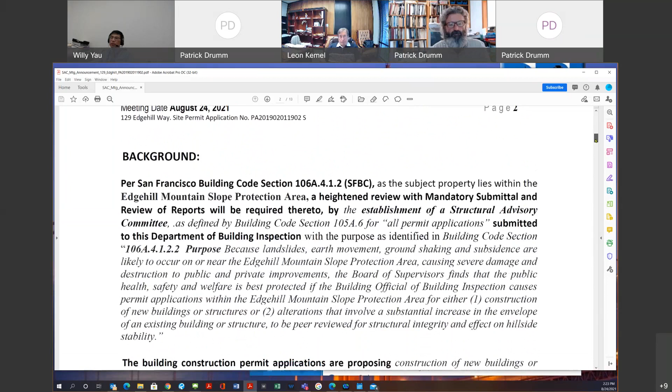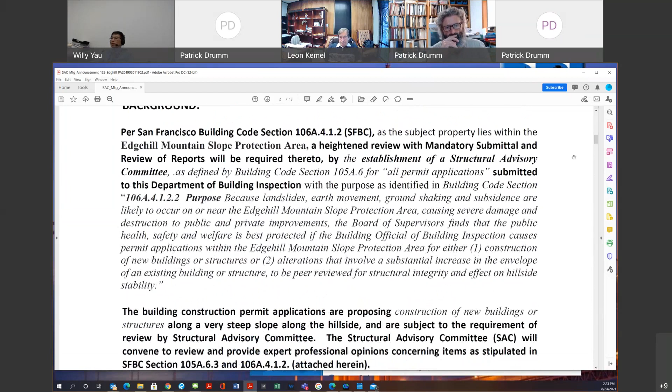Per San Francisco Building Code Section 106A.4.1.2, as the site lies within the Edgehill Mountain Slope Protection Area, heightened design review, with mandatory submittal and review of reports, will be required by the establishment of the Structural Advisory Committee as defined by Building Code Section 105A.6 for all permit applications submitted to the Department of Building Inspection, with the purpose as identified in Building Code Section 106A.4.1.2.2. Because landslide, earth movement, ground shaking, and subsidence are likely to occur on or near the Edgehill Mountain Slope Protection Area, causing severe damage and destruction of public and private improvements.

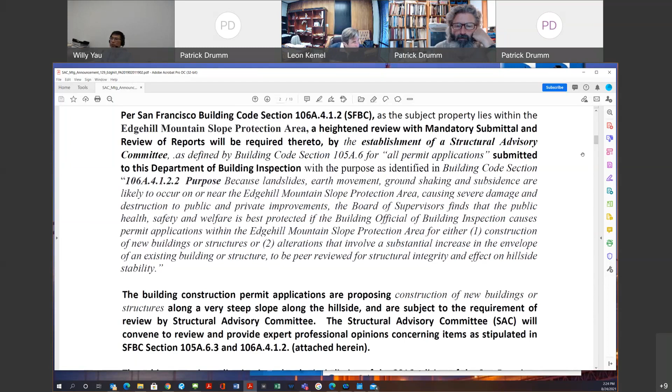The Board of Supervisors finds that the public health, safety, and welfare is best protected if the building official causes permit applications within the Edgehill Mountain Protection Area for either one, construction of a new building or structure, or two, alterations that involve substantial increase in the envelope of an existing building or structure, to be peer reviewed for structural integrity and effect on hillside stability. The building construction permit applications proposing construction of new buildings or structures along a very steep slope along the hillside are subject to requirements of review by the Structural Advisory Committee.

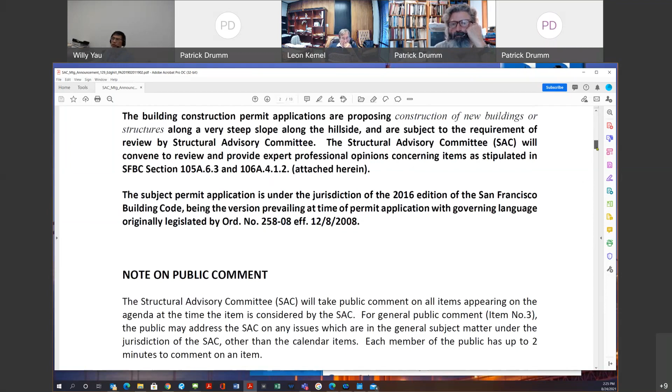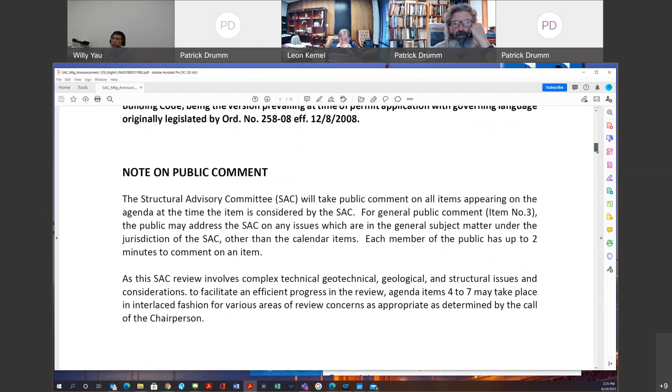The Structural Advisory Committee is convening to review and provide expert professional opinions concerning items as stipulated in Section 105A.6.3 and 106A.4.1.2, attached in the announcement. So the subject permit application is under the jurisdiction of the 2016 edition of the San Francisco Building Code, being the version prevailing at the time of permit application, with governing language originally legislated by Ordinance 258-08, effective December 8, 2008.

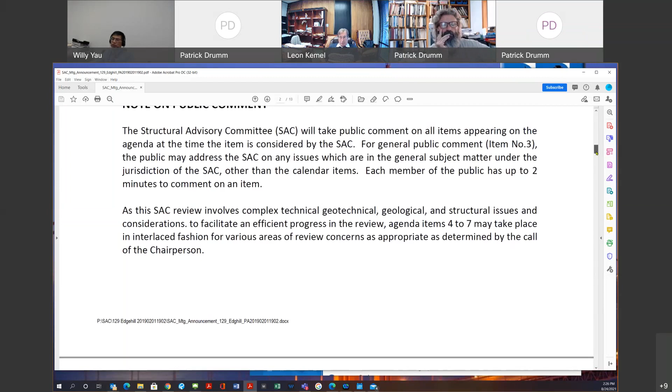Okay, the Structural Advisory Committee will take public comments on all items appearing on the agenda at the time the item is considered by the SAC. For general public comments, agenda item number 3, the public may address the SAC on any issues which are general subject matters under jurisdiction of the SAC other than the calendared item. Each member of the public has up to 2 minutes to comment on an item. As these SAC reviews involve complex technical, geotechnical, geological, and structural issues, to facilitate efficient progress in the review, agenda items 4 to 7 may take place in interlaced fashion for various areas of review concerns as determined by the call of the chairperson.

So let's move on with the agenda. We've got to do the roll call. Frank L. Rollo, Geotechnical Engineer. John Wallace, Certified Engineering Geologist. I'm here. Okay. John Hom, Structural Engineer. John? Can you hear me? Yes, you're here, right? Yeah, I'm here. Okay. Harvey Hacker, Architect.

Here. Okay, so the next item is the SAC to select a chairperson to conduct this SAC review meeting. Any motion? I nominate Frank Rollo. Okay, any second? I'll second. Okay, and let's take a vote. John? Yeah. John Wallace? Yes. And Harvey? Yes. You have the motion.

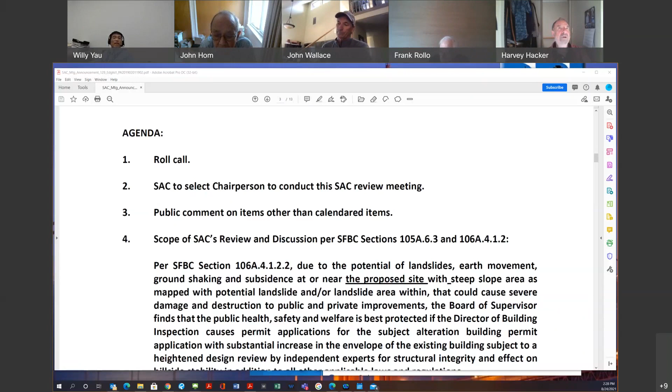So Frank, you are selected as the chairperson to conduct this meeting. So I'm passing this meeting to you. Okay. All right, thank you very much, Willy. So let's start by Troy or Leon, whoever, one of you introduce your team and their role.

Okay. So I'm Troy Kashanipur. I'm the architect for the project. We have with us today Leon Kemel, who represents the owner, JUB Investments. We have Alex Voldarsky, did I say that right, Alex? I hope I got the last name right. So Alex is kind of a project manager and coordinator for the engineering side of this, which includes, we've got Gary Kleiner.

Did I say that right, Gary, your last name? And Gary is on the shoring engineer portion. We have on the call, we have Tony Samra. Yeah, Tony, I'm sorry. Yeah, I'm looking for this name listing. It's not showing up here. So we have Tony also on this. It's shown at the end. What's the last name, please? Samra, S-A-M-R-A. Thank you. And then we have Patrick Drumm as the geologist.

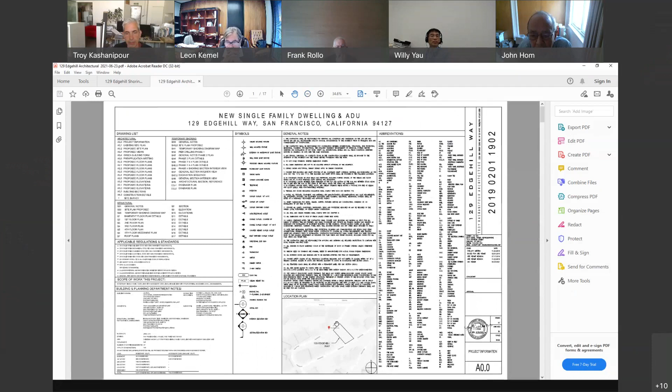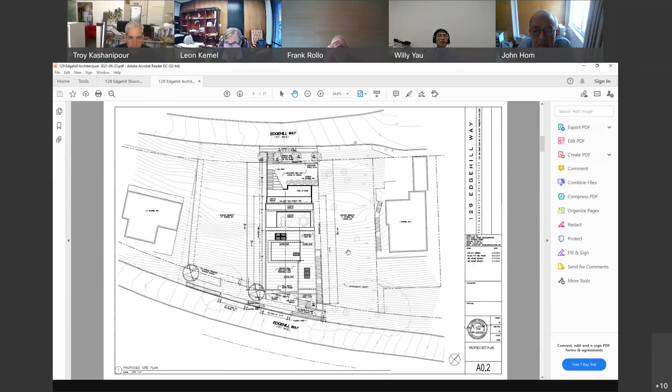So the basic site map: Edgehill is a curvilinear street with the lower portion of Edgehill being towards the north and the higher portion towards the south. This property at 129 was previously 3 vacant lots. There has been a home built at 127 Edgehill. There is another proposed home at 131 Edgehill being coordinated by a different architect. So let me go to a basic 3D view. As you can see in the upper left photo, the entry is at the top portion of the hill with the 2-car garage and living space behind the garage. And then the building steps down roughly following the slope of the hillside with the idea of minimizing the amount of excavation.

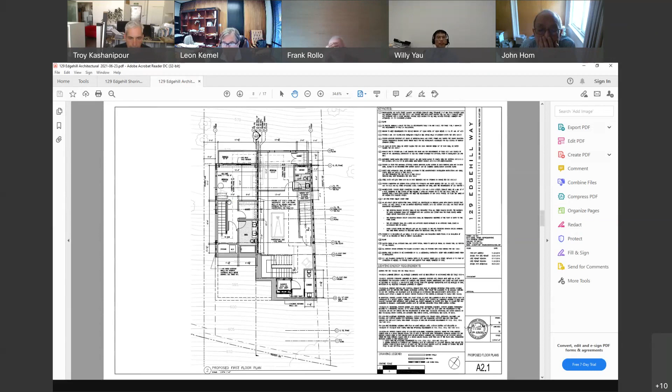I'm sorry, can you go back to that? I assume we're looking at the middle building, right? Correct. Yes. So this is the proposed dwelling at 129. The white building to the right here is at 127, and that is already constructed. And you may remember that project going through SAC review maybe 3 or 4 years ago. Very well. The building at 131 is here to the left as currently proposed. So if you just look at this rear view, let me see if I can zoom in a little bit.

This upper level here is the main living level, and then this area under the slanted roof is the mezzanine itself. And so we have 1, 2, 3 levels below the main living level, and then a basement level, as this below grade level qualifies for the definition of a basement. And this is as seen from the lower level of Edgehill Way.

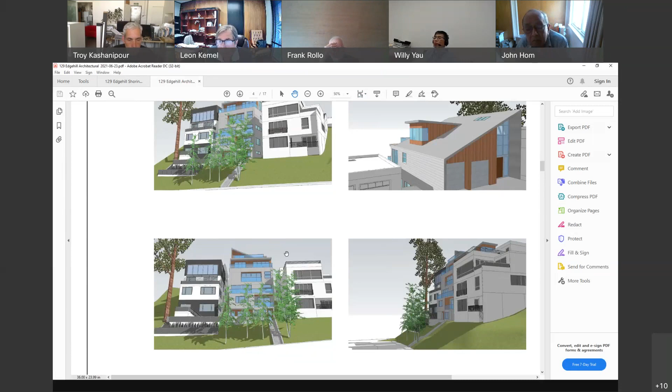On the side view, again, you get a little more perspective on the stepping of the volumes going back from the lower portion of Edgehill, terminating at this mezzanine level underneath the slanted roof. Let me just skip over to the... Troy, quick question, if you can go back to that previous drawing.

Sure. Okay, I just want to point out that the area below all the buildings is actually improved, not like a grass lawn as we see now. It has retaining walls, it has steps, it has all sorts of things. So there's an approximately 5 to 7 foot retaining wall at the property line, and the grade is not as substantial as shown here.

On building 127 itself, you mean? Yeah, correct. The model does not reflect the work that was done at the rear of 127, the existing building. Right. I just want to point out that that is the case. Okay. Oh, thank you. That's a good comment.

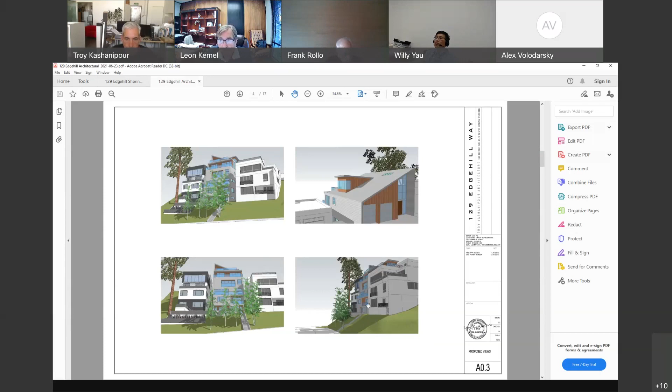You have a picture, Troy. What's that? Well, you have a picture. Let's focus on the architect making the presentation. The questions will come from the SAC. And then if the other members of the team wish to make comments, they can. But this right now is the architect's presentation, followed by Harvey and then the rest of the SAC. So let's focus. Go ahead, Troy.

Thank you, Frank. So I'm just moving over to the floor plans. This level that is on the screen now represents the basement. I have tried to coordinate the grid lines moving up through the set between the architectural and the structural drawings. And so this is the lowermost level considered a basement.

And then stepping up to the first floor, we have a small terrace, and then there is an accessory dwelling unit associated with the property. So this leftmost portion is part of the ADU, and the rightmost portion is part of the main home. So first floor plan, stairway coming up, and then the main stairway, an elevator shaft that integrates the entire building.

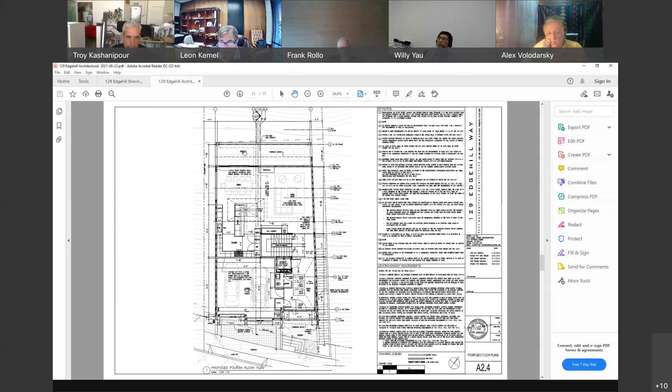And then one level above grade, we have our mezzanine space, meeting the definitions of a mezzanine, and then another terrace level above the floor below. And that's the fourth floor mezzanine.

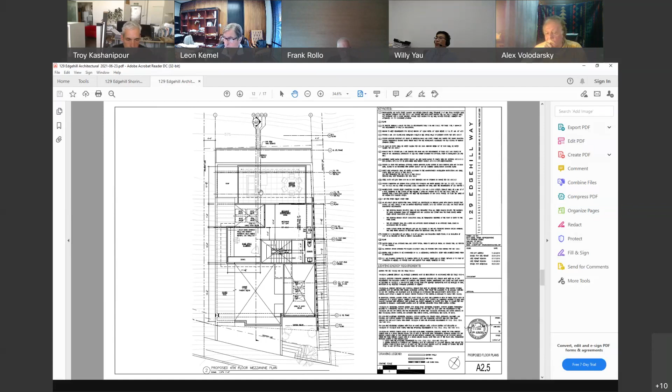Looking at the rear and front elevations, I've dashed in the street elevation at face of curb, and then the grade at the face of the building on this proposed south elevation. And then the rear elevation, of course, you can see all of the levels of the building, including the mezzanine and the basement level. The basement level at the rear has a full exposure, I would add. So it's not what you would think of as a below grade basement.

The side elevation, this is west, showing the existing contour at that west face of the building. And then the same exercise on the east side, showing the existing contour line at that east face. And then the building itself, showing the cross section at the middle of the lot, so you can kind of see the approximate level of cut, and in some cases where there is no cut relative to the existing grade. And then the rest are just architectural details as needed for permit in this set.

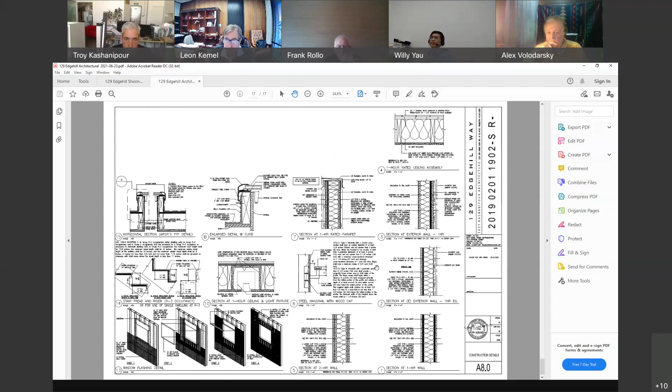Can you go back to that drawing? Was it A3.3? 3.3, this cross section? Yeah, there you go. So that line represents the ground surface today? That represents the existing ground surface at the center line of the lot, right, the center line of the building. Okay.

So what is the maximum cut? Unsupported. I think the maximum cut is approximately, it's a little small on my screen. So it's about 15 feet, I would say, at this location. Where's that? That's grid line C0. Okay, the one I'm looking at shows that the cut is about 10'6", but it's more than that then. Yeah, I measured 17 feet, Frank, is the max that I saw from the base of the slab to the top.

And I guess we'll see that on the structural. Okay, well, thank you, Troy. Are there any additional questions from me? Well, yeah, Harvey, it's all yours. Can you hear me okay? Yes. I understand the plans and the sections. I have no questions.

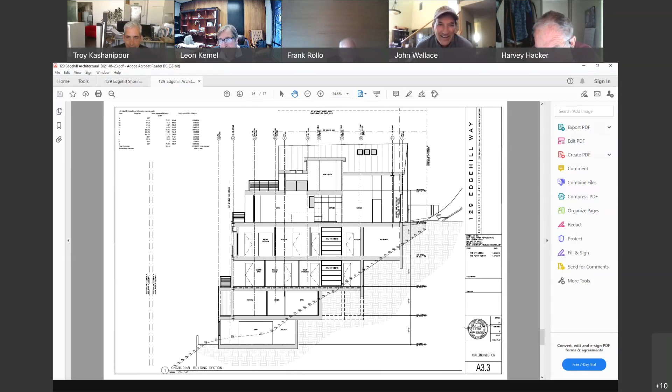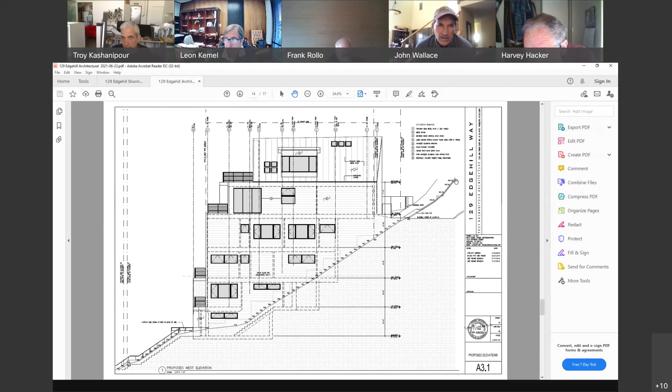I think the best drawing to look at is A3.1. Look at A3.1. You'll see the road. And then he's showing a projection of the road going uphill as well as the slope at the back of the road. He's showing two things on that. See where it says sidewalk entry? And you see it says new curb? Yeah, that's actually the street going up. And then if you go to the right of that, he shows the street with another slope.

So what he's showing is the street going to 131 Edgehill. It's not necessary to show it. It's confusing. It's really confusing. Yeah. And if you look at that same drawing, you'll see that the maximum cut on that one, if you add the two, you get 11'6" and 10'6". You approximately have 21.5 to 22 feet of cut. Just for making, so, okay. John, do you have any more questions of the architect on this? No, that was it. Okay.

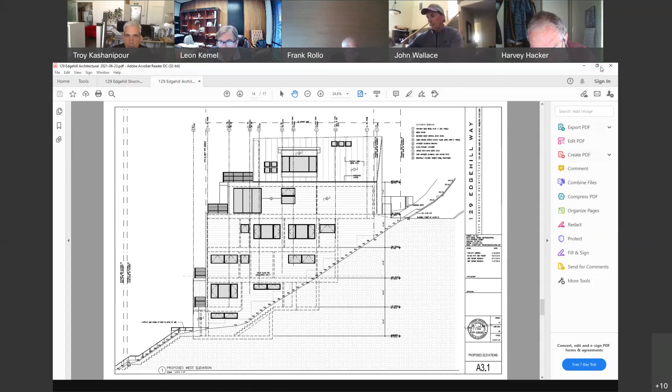I will have more questions later on, Troy, when it comes to drainage, subsurface drainage, but I'll reserve that till later. I think we should go on to now what is perhaps the most important part of this discussion, and that will be the geology. So Patrick, perhaps between you and John, you have put on many years walking these hills. Perhaps you can walk us through the history of the site as well as your...

Chairman, yes, sorry to interrupt. Do you entertain staff questions regarding architecture? Sure, absolutely. Okay, I have a comment on this thing here. Looks like more than 4 stories of construction are being proposed in this Type 5 building. So I was just wondering if you anticipate having Type 1 construction with the Type 5 on top?

No, if I can refer you to the pre-application meeting from Irene, it is Type 5A construction. We did the grade plane calculation to document the lower level as a basement, and then the top level being 1/3 the area of the upper floor, which would qualify as a mezzanine. So that's the approach that we've taken with it. Okay. Now, be aware that you cannot have more than 4 levels of combustible construction in this Type 5 here, right? There's no more than 4 stories. Not 4 stories, but 4 levels of combustible construction.

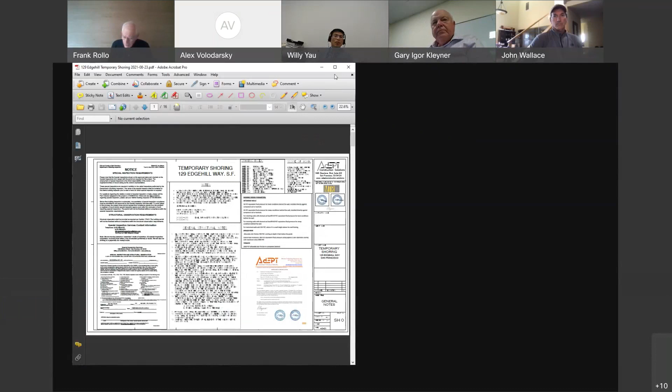But you're going to have to show your calculations. I'm not here to check your calcs. I'm just checking the design parameters. DBI will do a thorough job of that. I would like to walk through your drawings. So, Troy, if you would put the shoring drawings up, and we'll start with SH0. Okay, can you see that?

Yeah, the letter that I have is dated April 28th, 2021. Do you have a different letter? Yes, it's August 10th, 2021, in the current set that came a couple days ago, and I added it to the folder. Frank, it was too late to get you the printed copy, but it is in the shared drive folder.

Okay, Chairman Rollo. This is Willy. I have to discount everything they put in without noticing us and without noticing the public. Those items should not, and I've mentioned it before, be included in the common file because that is for all the public to review. So procedure-wise, those documents should not have been there.

If there is anything after the initial announcement that is going to be updated, it has to be presented during this meeting rather than being in the common files that we are announcing the SAC review meetings on. And this is a serious problem that you start changing stuff in that Dropbox, and it is prohibited to do that. Right, I'm with you, Willy.

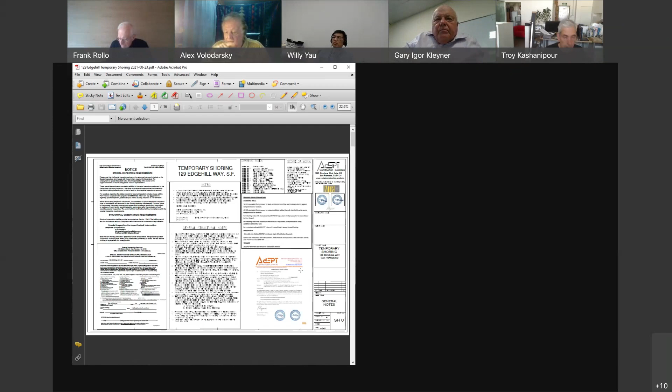Somewhere on these drawings, there has to be a testing procedure for the tiebacks. Do you load them in 10% increments, 20% increments? Are they proof tested? Are they performance tested? What's the lock off? What's the allowable deflection that will be allowed? There has to be a procedure for tieback testing, and it's not present. Okay, we'll add that.

SH1. This drawing shows on the shoring diagram 2, SH1, a gravel backfill behind line D. You've just created, for the driveway upper portion, a bathtub. Yeah. That's a big drain filled with gravel, and it's acting as a bathtub.

Now, unless you've designed a pipe outlet that can handle the water that would come from that bathtub, I strongly encourage you to reconsider a gravel backfill and go to a sub drain behind the wall and then a compacted fill behind that. Well, there is a sub drain, and as well as below the surface drainage, there is a number of pipes in that area. Yeah, but they don't show up anywhere. So we'll get to that.

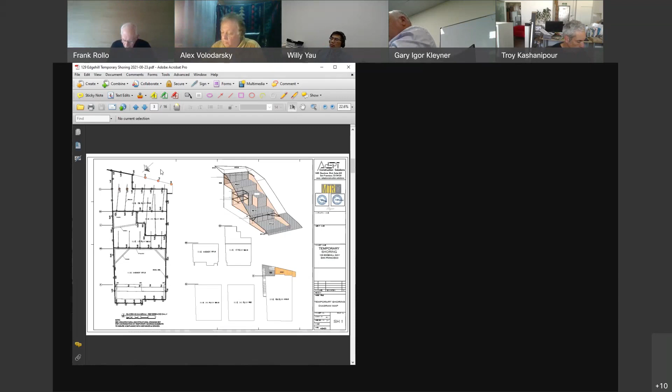You're gonna use a drain board receptor to drain the backfill. And it's what, 6 feet deep? No, it's not 6 feet. It's approximately 3 feet deep. Well, if you can demonstrate that you can handle any drainage coming off of that, I'm happy with it. But check that, please. Would you go to SH2?

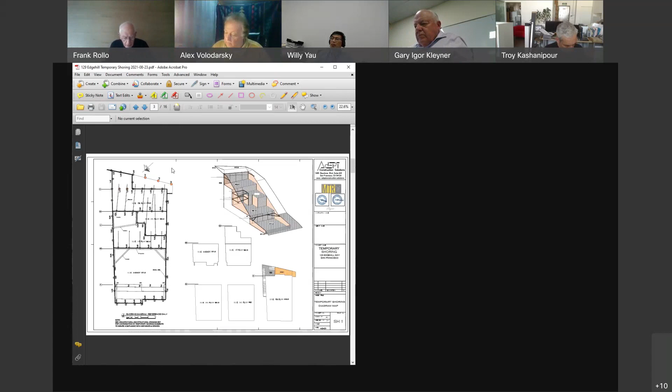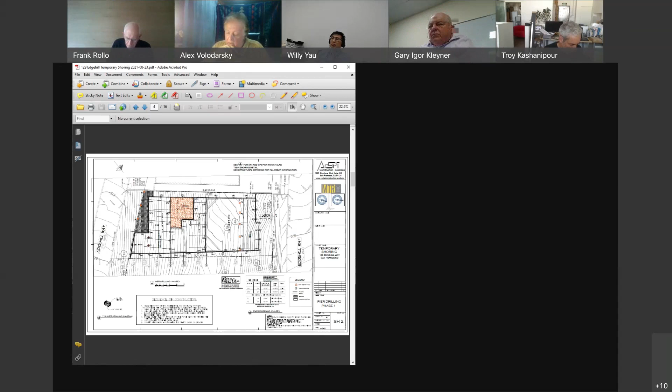SH2, John has indicated, we'd like to see the soldier piles numbered and the tiebacks numbered. And if you go over to the pile schedule, it says that SP1s and SP2s are 24 inches diameter and that the drill depth is 10 feet. How can that be? Well, we're taking the depth from the base of excavation at any given soldier pile. I appreciate that, but that's not what it says. This is depth below excavation, so please say that.

I already have it in my change plans. I know, but it's already done. Okay, thank you. Well, those change plans don't exist right now. I know. Okay.

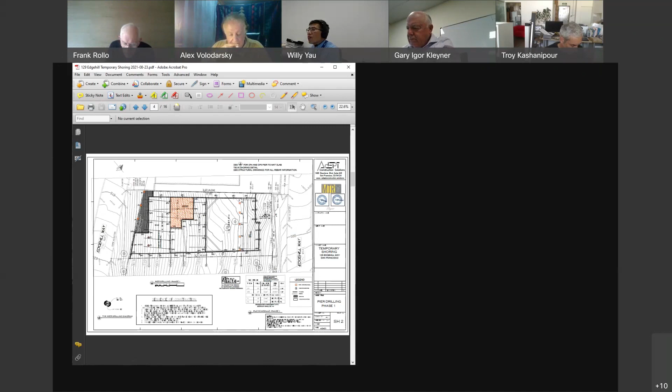It'll show all that. Okay, under the sequence of construction, it says install soldier pile, leave 5 foot extended as shown. Where does it show that? Well, on the soldier piles in detail 1. I got it. Where's the extended? Oh, I see. Got it. Thank you. All right.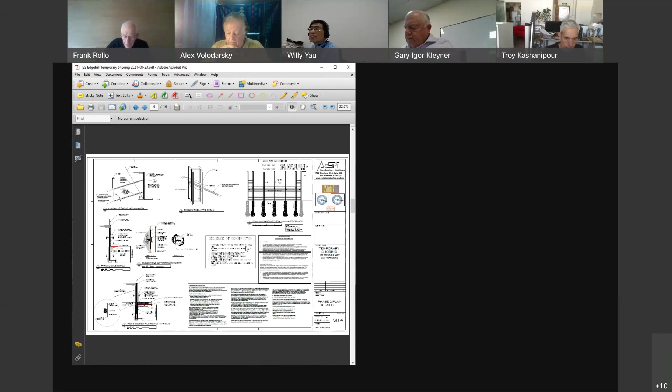SH5 is a braced wall. Hold on, let me turn the page. Okay, SH5, it's a braced wall. So that wall is designed for 30 PCF. It seems to me that you've got two conditions. You've got 9 feet of soil. How are you considering it? I assume the soil is higher.

Well, there are two different conditions here. There's 2 lines. There's expected bedrock and there is substantial soil. The upper 3 feet or 4 feet are what is considered a loose soil. Below that, we have a very hard clay. And below that, we have a very hard bedrock.

Okay, I'm sorry, but you must be looking at a different geotechnical report. I'm looking at the only tests that were done, for SPT, I'm sorry, dynamic cone. And if I look at the dynamic cone, you classify it as a medium sand. And then I don't see any clay.

And it goes on, and then on boring 2, it's sandy soil, poorly graded with bedrock debris. On boring 3, it's a sandy soil with bedrock debris. There's no distinction between whether it's slope debris or fill. So you do not, based on the boring data, have any hard clay.

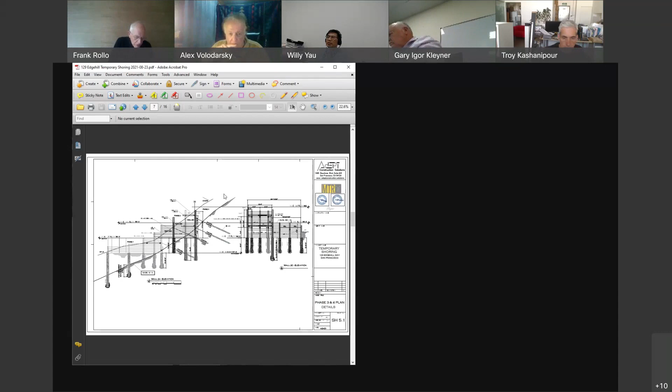And then on SH 5.1, you show that gravel again, and you believe that that's shallow. And then on SH6, you're calling out the ground surface. It would be helpful if on that diagram you plot, based on your borings, the 5 to 9 feet of soil, so you can see what I'm talking about as far as whether the soldier pile lagging and the tieback should be designed for soil condition. I'd like to see a profile on SH6.

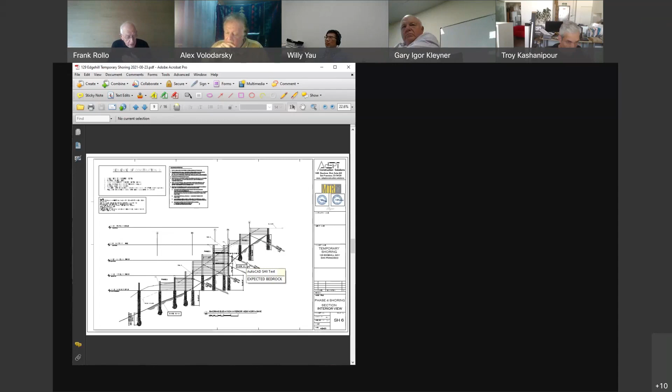Right. I've drawn it for myself on SH7, so that we are on the same page. If you go to SH7, that gravel is 8 feet thick. Yep. Not 4 feet thick. On the top or on the bottom? At the bottom. I love it. On the bottom, I have bedrock at about 13 feet deep.

All I'm asking is just please look at it. If you plot the ground surface at 606, the rock at that location is about 7 from that, 599. That entire gravel backfill is sitting in soil. None of it is sitting in rock. That soil is going to get saturated. That soil creates a problem for you if you don't have adequate drainage. Right, I agree. That's why on that sheet I show benching.

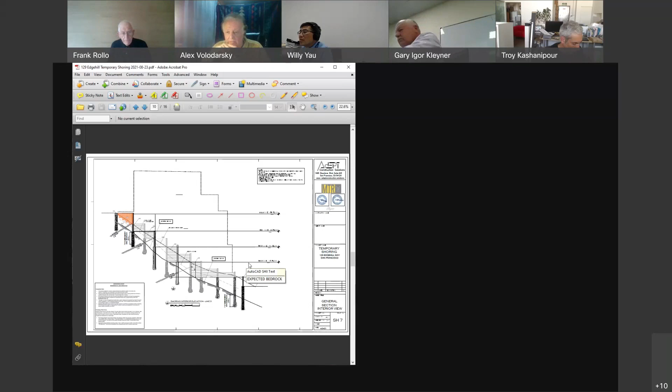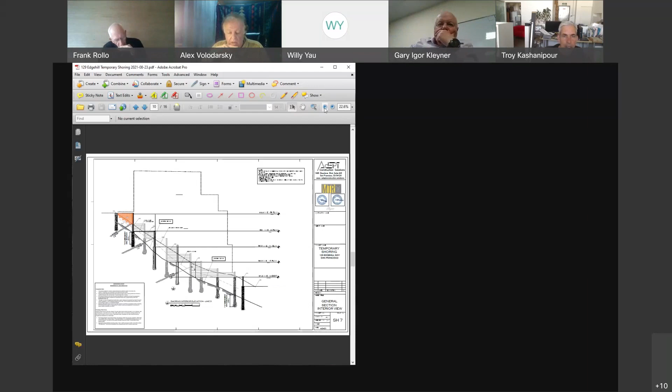Hey, sorry to interrupt. Troy, can you maximize the screen, please? Maximize the window, the PDF, yes. Let me see if I can do that. Sorry, wrong way.

See, the front part, the upper part, the benching is actually not the existing grade. The benching adds the height of that gravel, approximately 2 feet.

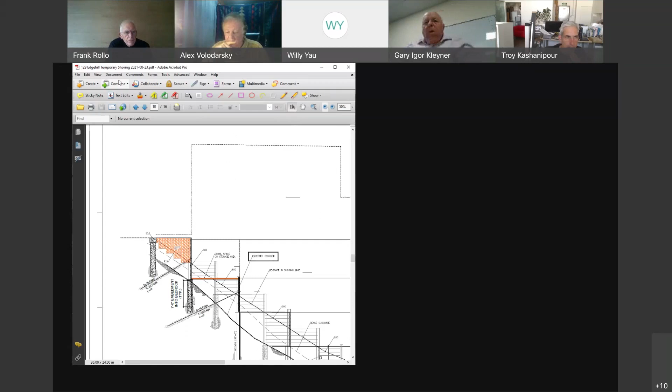Yes. Could you click the square next to the X, please? Square next to what? Top right of the window, of the PDF window. Just maximize it. Have I not? Give me 1 second to figure out how to do that. Gentlemen, I'll be right back. Needs a bathroom break real quick, sorry.

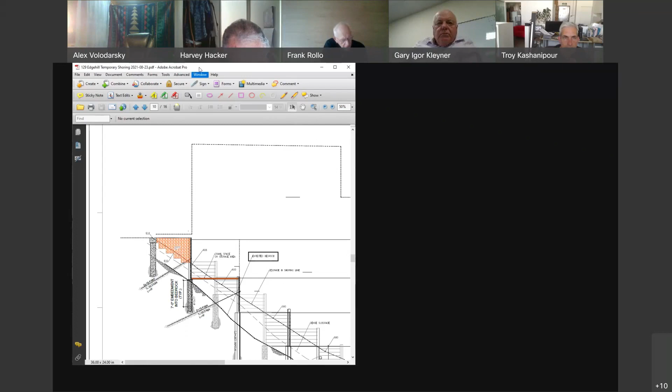Sure, but my point on that is you keyed the fill into loose backfill. That fill should be keyed into rock. That fill, in my opinion, should not be gravel, which is acting as basically a seepage. You're going to allow that area to act as a bathtub and fill with water.

And actually, Frank, this is John, that's not even native soil up there. That's road fill that was cast over, and it's even looser and in worse shape than the actual in-place soil. Thank you. You strengthened my argument. You got to key that into rock, yeah. Put it in as a compacted fill. So the main point here is that either the gravel backfill needs to be reevaluated, or the drainage system needs to be able to handle that volume of water.

Is that? No, I'm suggesting the gravel acts as a bathtub, and you're not going to be able to show me a calculation that shows it draining quick enough, especially when you're using a drainage panel. Second, you've got the gravel blanket keyed into loose to medium dense material that hasn't been distinguished between fill or slope wash. But as John pointed out, when they did a cut to fill for the road, that's all dumped fill. That should be keyed.

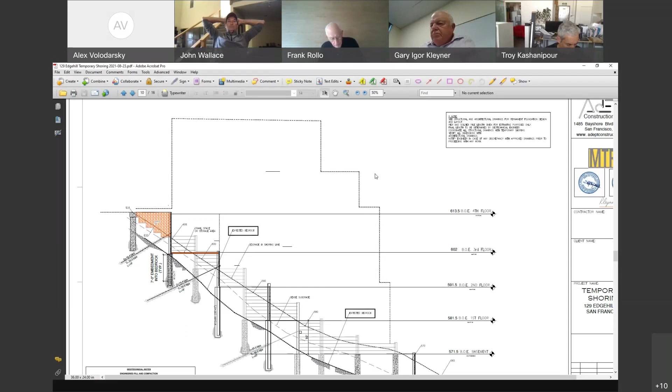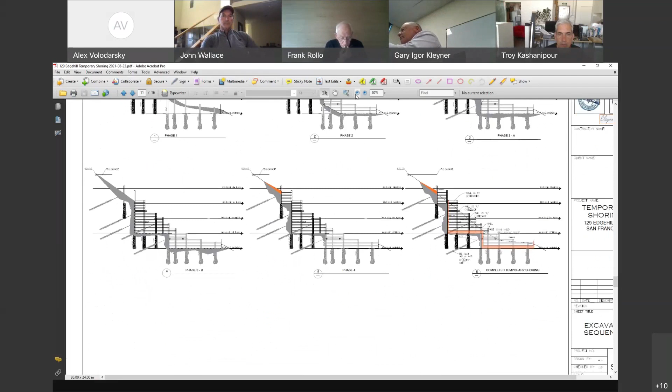I'm giving you all the issues that arise doing it in the manner that you're suggesting. And if you wish to do it, treat it as a burrito and wrap it in a filter fabric. No problem. We have filter fabric on all drain pipes, but we can add more drain lines in there. And there is a trough line drain running through the entire area. Okay. So now if you would kindly go to the drainage plan. And I guess it's DC2 is the subdrain plan, right? Well, there's a DC1. That's a surface drain.

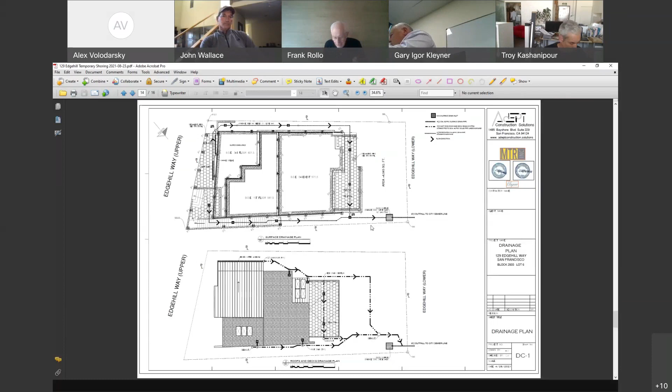Well, yes, and the area that you were referring to, for example, for that fill, shows 2 line drains up on the surface. Yeah, but that's a surface drain. I'm talking about a subdrain. And that's on DC2. Show me on DC2 how that subdrain behind that gravel works, and then show me where are the cleanouts in this subdrain for all these wall drains. And 3, you talk about a pipe, yet you're calling out on the plans, on the section, a drain board receptor, a drain board against lagging. You don't show a pipe.

You show a pipe coming into the inside, but all you're using is drainage panel behind the wall. Yeah, so if there is any water behind that gravel, it will drain through the drain board, through into the pipe. Exactly. Well, you've got, what did I say, 8 feet of gravel sitting on loose soil that should be keyed into rock. Well, you need to provide a better detail of what you're doing behind that gravel. Well, that's fine. I think what you're referring to is there should be a couple of extra perforated pipes on the other side between the wall and the driveway.

I'm asking that you provide proper drainage for a gravel backfill. No problem. Provide appropriate filter fabric to prevent infiltration of fines and piping behind the gravel blanket. That's what I'm asking. Okay.

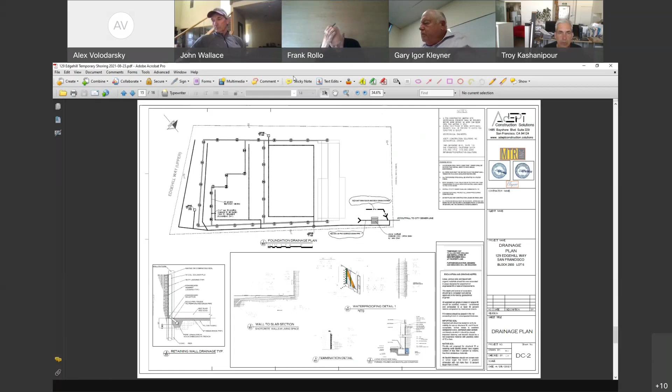John, you're on for the structural. As we understand it, you've got a pile supported mat. Is that correct? Tony, are you there? Yeah, structural drawings. John, do you have any questions about the structural drawings? Oh, no, I don't have any question. The building itself is adequate. But is it fair to assume that this is a pile supported mat foundation? Or is it a combination of mat on rock and pile supported mat on rock?

Yeah, like I said, he indicated he used the soldier beam toe as the key for sliding. Oh, okay. But it's a mat on rock, right? No, it's not. Well, that's what I'm asking. If you plot the geologic cross-section on the structural plans, the mat, especially the basement, is sitting mostly on soil. And so the basement is what looks to be a mixed foundation condition. So my question is, is that slab meant to span that soil, or do you need more internal piers to support that slab, since it looks like especially the upper levels are all on fill or soil.

You're right. That's exactly right. So if you go to the profile. Well, we have 18-inch concrete mat slab. S12 is the one, Frank. Yeah, that's the one. I plotted the same fill line, and this mat, some of it sits on fill, some of it sits on rock, some of it sits on drill piers.

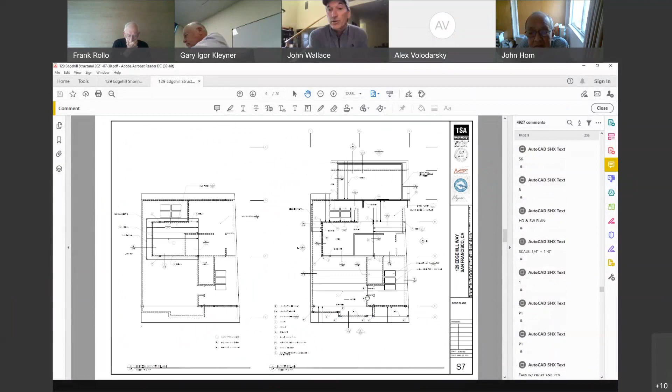Yeah, there's some internal piers, but it wasn't clear to me that slab was designed to be pier supported or span the soil, or if you even knew that it was not going to be on rock. So that needs to be addressed. Thank you. Yeah, I've got that. I've got the same point, because if you look between column lines A and B, and if you plot the fill, that slab sits on fill.

Right now, you have a system that sits on drill piers, on rock, and a combination of drill piers, fill, and rock. And I don't think that was your intent. I think your intent is to either put it all on drill pier or put it all on rock. Well, it's a combination. The intent was to use the piers as embedment, and we have approximately 20 of them. And it works in combination with 18-inch thick concrete slab.

But that 18-inch concrete slab should be sitting on rock, or designed to span whatever distance. And it looked like the spans were huge to me, but I'm not a structural engineer. No, it's only approximately 28 feet. It's not that huge. Well, the question is, can an 18-inch slab span? I don't know. What we're trying to say, we don't understand it as it's currently drawn.

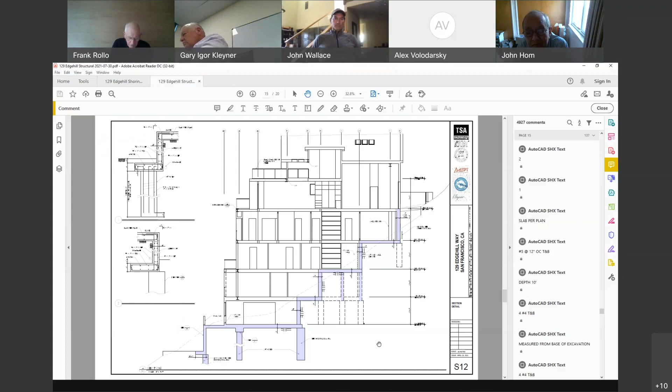For example, if the ground line is plotted correctly, if you look at the basement between A and B, that entire slab is sitting on fill. True, it spans, it goes between two drilled piers. It's 18 inches thick. But was it your intent that slab sit on rock, or is it your intent that it span from pier to pier? Well, the intent is it's sitting on a substantial soil. It doesn't have to be bedrock.

Your report says hard bedrock. All slabs to be supported on hard bedrock. Or underlayment underneath it. What's that? Or 12-inch structural fill underneath it. No, but the fill's sitting on rock. Yeah, no, that's not what your report says. That's right. Gentlemen, we'd like you to look at that again. Okay, well, we can clarify it, but your report, and I know that the projects that are up there that have been built either are on drill piers or sit on rock. Yeah. Or the slab is designed to span.

Now, if you've got calculations that show between A and B that entire slab can span, and Willie checks it and it's fine, I'm happy. Or not Willie, or Steve, or Jane.

John, maybe you can check if Tony can get through, because it looks like he was blocked. Can somebody check on that? The structural engineer? Well, he has a headphone on, so I'm not sure if he's listening or not. But he's definitely on the attendance list. Tony was the guy on the phone who couldn't get through, but we could hear him fine. He's trying to say something, but he can't get through. Who's trying to speak? 650 area code. Is that Antonio Samra? Antoine. Okay. Antoine does not have a mic. Try to unmute. Can you hear me? Yes, we can hear you. Oh, okay, finally, I'm through.

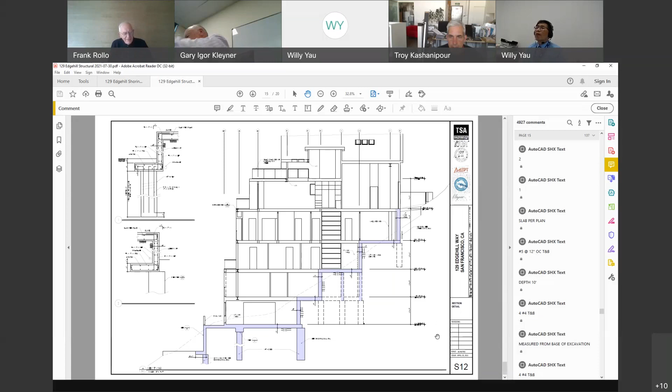And I'd like to know where you got those properties, that profile. I don't have anything after. John, do you have it? Sheet 17 is the last one on my list. Oh, no, there's a drawing. Yeah, that's the last one. There's a drawing that comes after that was created by Adept. There's no date on it, no number on it. It shows a cross section through the center of the site, and it's actually done for 131.

Yeah, that's a geologic cross section that Adept put together. It's through 131, Edgehill. Let me see if I can pull that up. But it's attached to 129. Yeah, I used that to plot exactly what we were just talking about. So I suggest you guys do the same thing. And you have to rectify the fact that the geotechnical engineer clearly recommends on page 18 that the mat foundation bear on hard bedrock materials.

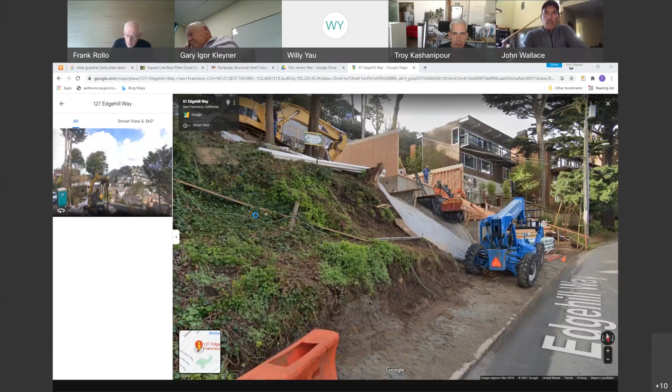Okay, we can resolve it offline. It's not a problem. Well, unfortunately, it is, because it's going to require that we have a second meeting. And I was hoping to get through this thing with one meeting. That ain't going to happen. Okay, we can add piers and make it a mat foundation supported on piers. Well, we raised a lot of questions between John and myself. And Troy, we made it difficult for you because you're not going to really know what's an action item and what isn't. But a lot of stuff's been thrown out here today.

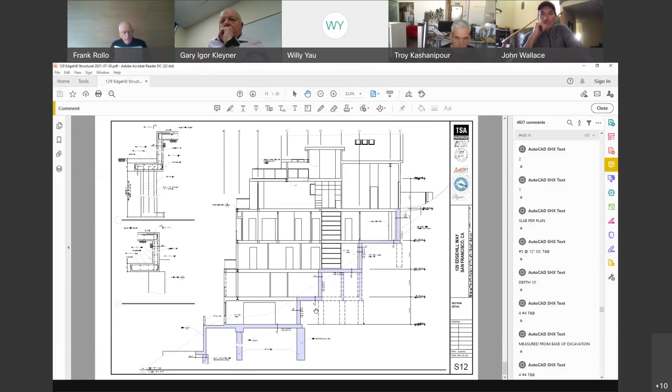Well, I believe the mat foundation sitting on bedrock could be just an oversight, easily corrected. Igor, can you step in here and say something? Yeah, the whole building will sit on the piers or on bedrock. Otherwise, there will be differential deformation. The area in question, when we do excavation, it will be bedrock or piers.

Okay. So can we state very clearly that this residential structure will be supported on either drilled piers, or a mat foundation resting on rock, or a mat foundation capable of spanning between drilled piers? Are you talking about the lowest level? I'm talking about the entire structure, because the same thing applies further up on C0. I think I called it out on C0. You have the same situation at C0. Yeah, spanning? We have it on 2 upper levels, yes.

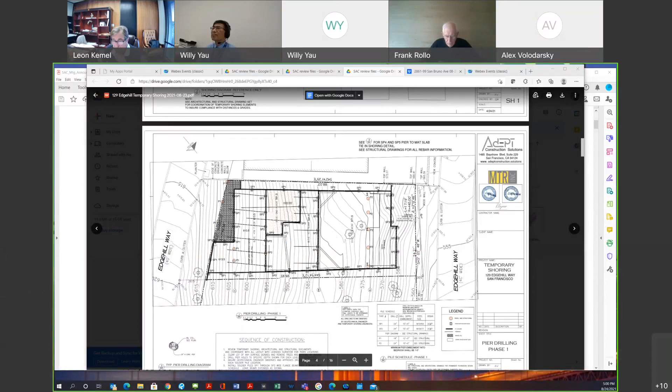Leon, unmute yourself. No, I don't know what's going on, but I am checking, and if you ask me, I will unmute. But now I am okay. Leon, can you turn down the volume? Okay. Janie, I've been muting him, but he's been unmuting himself. Can you put the presentation on my screen? Yes. Let me find my share. Can you see my screen here? Yes. Leon, I'm gonna have to mute you because we keep hearing the echo. If you need to speak, raise your hand, please.

See this row of soldier piles? You mean on upper Edgehill? Yeah, this row here with 4, 5. Yes. You should keep that inside your property line, or else get an easement. You have to check with DPW to see if they allow you to have that encroachment. Well, 127 Edgehill had the same situation and it was no problem. Well, did you get an encroachment from DPW?

Well, there's no sidewalk there right now. There needs to be a sidewalk. The improvements that are here are not actually shown. So you intend to encroach, is that correct? With the piers, there are 4 piers that will encroach past the property line. So if you intend to encroach, then it has to be provided with encroachment permits from DPW. No problem. Okay.

Now, at the edge of this gravel bed that you are including, you show that right at the property line, up to the property line. So basically, are you backfilling above your adjacent property's retaining wall? Yes. Okay, so are there retaining structures along this side here? Yes, there is an existing self-contained retaining wall structure that is there right now.

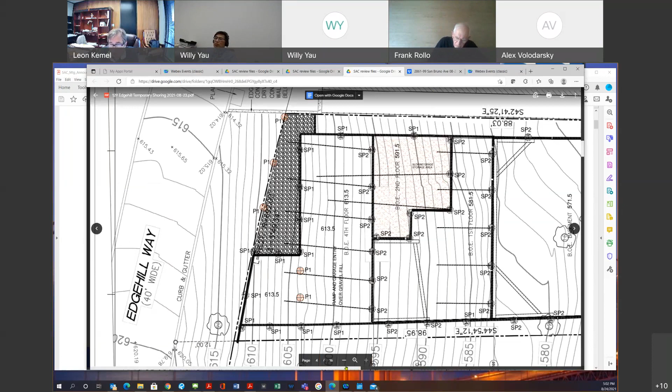So back to you, Chairman Rollo. Thank you. So at this point, not having any public comments, I'm closing the meeting to the public and to the applicant, and this is a discussion now with the SAC only. We have had many comments, and what I sense are many questions and many action items. It was my hope that we might be able to deal with this property with one meeting on the basis of the exchanges that have gone on and the issues that have been raised. I don't believe that that's practical.

And I'm of the opinion that the applicant should go back and first of all, prepare minutes that can be sent to the SAC and to DBI for its review. And then including those minutes, action items that we can add to or agree to, and then prepare responses to all the action items, which will mean addendums to the reports, changes to the plans. And then I believe that we will need another meeting to go through the action items only and the responses to those action items. I'd love to hear from the rest of you if you share my views, or what you believe is a more appropriate way to proceed.